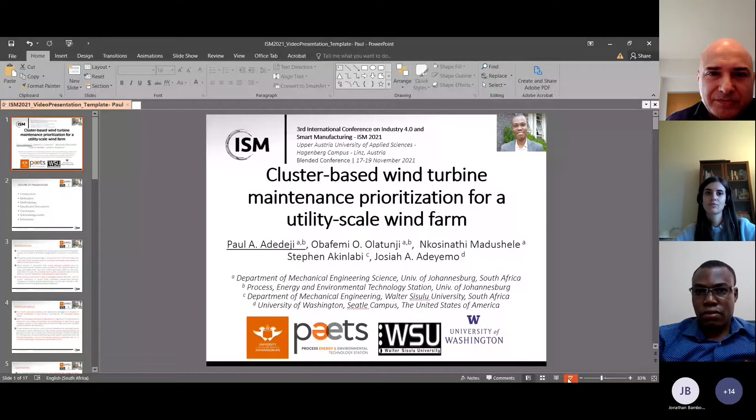Okay. Can you all see me? Perfect. Yeah, perfect. You can start. Visible. Okay, thank you so much.

Good day, everyone. My name is Dr. Paul Adedeji from the University of Johannesburg, and I will be presenting the article titled Cluster-Based Wind Turbine Maintenance Prioritization for a Utility Scale Wind Farm. And that is a list of the co-authors with which we worked together on this project, and their affiliations as well as their university logos. Yeah, this is the outline of my presentation.

Introduction. It is anticipated that renewables will occupy 2/3 of the global energy mix by 2050 if the renewable energy uptake increases by 1.2% annually. And that is what we have observed over the years, that renewable energy is fast taking up the stage in the global energy mix. And we could see the advent of more wind farms being added to the global energy mix.

And we've also observed that in ancient times, we just had one wind turbine, two wind turbines, but now we have large scale wind farms, and we have quite a lot of wind turbines on the farm. And this is not bound to reduce at any moment, but increase at a very high rate. For example, we could see the wind farms in Kenya, which is one of the largest in Africa, if not the largest. We could see those in South Africa. We have a lot here in South Africa, and this space is fast increasing.

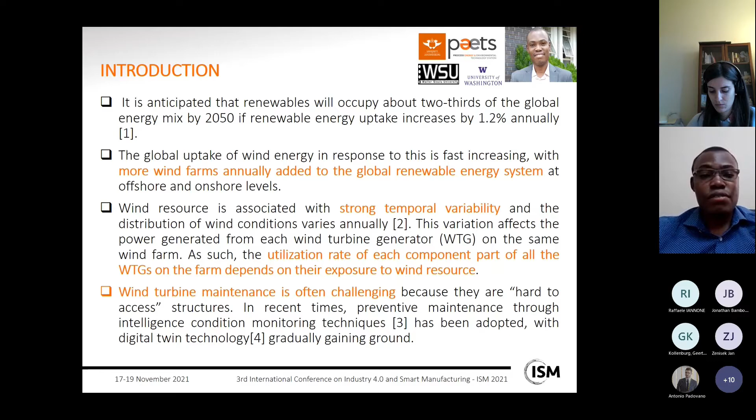So wind turbine maintenance has often been challenging because wind turbines are hard to access structures. We have some wind turbines that are 100 meters from the ground level. There are some that are situated at 80 meters. So many new wind turbines now have cranes that wind turbine operators or maintenance personnel could use to get to the nacelle. And this is very much challenging. Hence, intelligent condition monitoring techniques have been resorted to in recent years.

And the fourth industrial revolution, which has significantly leveraged the prowess of artificial intelligence in many sectors, is fast increasing. And of course, the renewable energy sector is not left behind. In fact, the increased digitization of renewable energy resources has improved the maintenance and operation procedures and schedules of wind farms through the use of intelligent models which leverage the data collected from supervisory control and data acquisition systems, that's the SCADA, of modern wind farms.

And cluster analysis is one of the useful tools that could be deployed on wind farms for maintenance activities. And that is the crux of this presentation or this research. Cluster analysis uses attributes of objects that are close to one another to cluster them together such that each cluster has similar or nearly similar attributes, with differences between the attributes of components of the same cluster not significantly different.

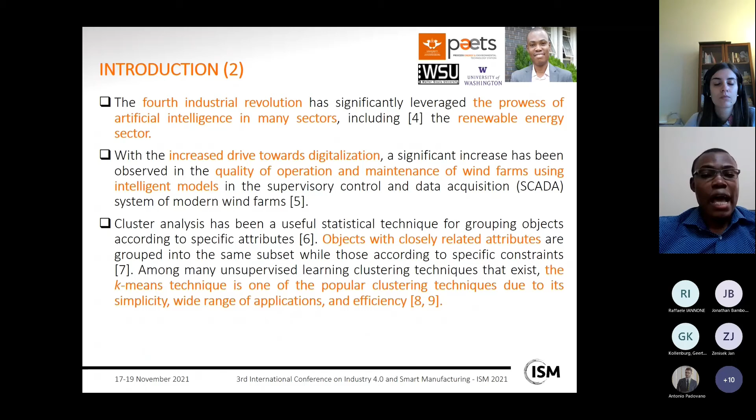And among these clustering techniques is K-means clustering. This is an unsupervised learning clustering technique which has been used in wide applications due to its efficiency and effectiveness. What is the motivation for this research?

We discovered that the growing demand for electricity in Africa, or let me say globally, has been on the increase, and wind farms are prolifically increasing. Hence, there is need for more strategic planning. And just as I earlier said, on the same wind farm, each wind turbine receives wind energy at different proportions due to the spatio-temporal variability of wind resource.

However, if these wind turbines receive wind energy at different proportions, imagine if we now have a very large wind farm with quite a lot of wind turbines, of which each of these wind turbines crave for maintenance, or maintenance activities are to be performed on each of these wind turbines. Yes, we have quite a lot of things that are to be considered.

For example, if we have 10 wind turbines that need the same maintenance or nearly the same maintenance all at once, how do we now prioritize? Which one should we go for first? Which one should we go for second? That is actually the motivation for this research, through the use of clustering techniques.

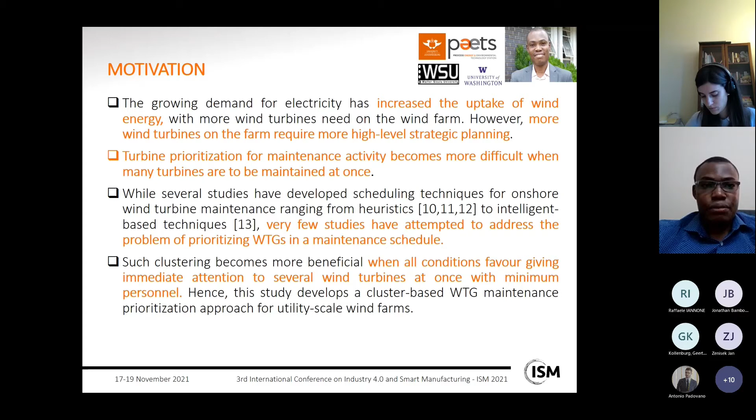So this study aimed at clustering all the turbines in the case study wind farm into different clusters based on the wind resource they received, and hence prioritize maintenance activities according to this. Of course, there are quite a lot of factors that should also be considered before embarking on such wind turbine maintenance activity. And that is the motivation for this research.

So for the methodology, we used Nojoli Wind Farm. Nojoli Wind Farm is one of the wind farms owned by Enel Green Power, an Italian independent power producer in South Africa. The wind farm is located at the Eastern Power Corridor of the Renewable Energy Development Zones in South Africa. It comprises 44 wind turbine generators, each of which has 2 megawatt installed capacity, which gives the wind farm an aggregate of 88 megawatts installed capacity.

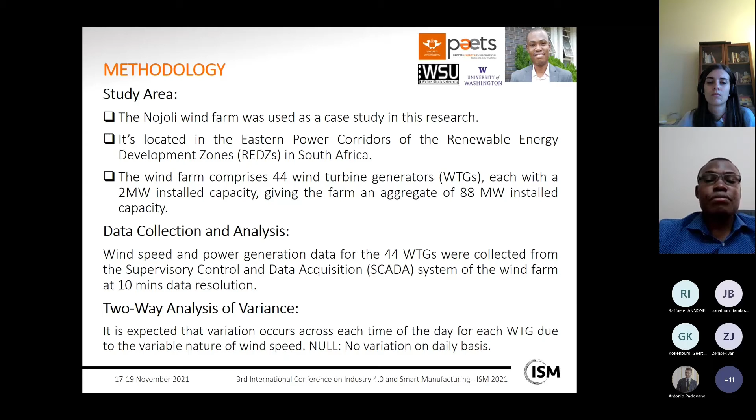For this study, the wind speed of all the wind turbine generators were collected at 10-minute data resolution. The null hypothesis we set is that there is no variation in the wind speed received by each of the wind turbines on the wind farm. That is, every wind turbine receives the same wind resource, wind speed, which we tested using the two-way ANOVA.

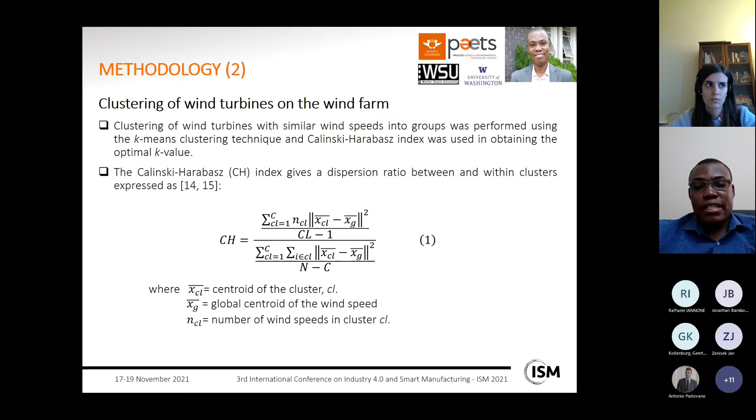We used the K-means clustering technique, and K-means is a parametric method which requires the user to spell out the number of clusters to be expected in the data set. And this is actually one of the challenges of K-means clustering. So we used the Calinski-Harabasz index to obtain the K value for the K-means clustering technique, as stated in equation 1 projected on the slide above.

We used the Euclidean distance metric for obtaining the centroid of the mean wind speed for clustering, as stated in equation 2, and the new centroid is calculated using the J function in equation 3.

The wind turbine generators that receive high wind speed are expected to be more productive, and most certainly they are susceptible to early maintenance due to continuous movement of the rotor. They produce more energy, they are economically viable. However, the consequence is the maintenance activity on such wind turbines.

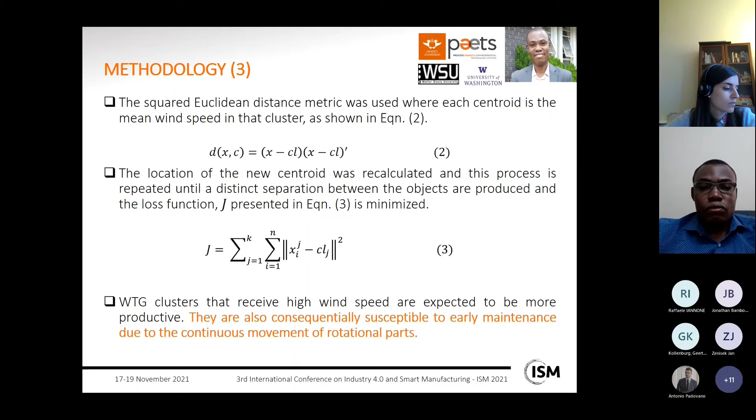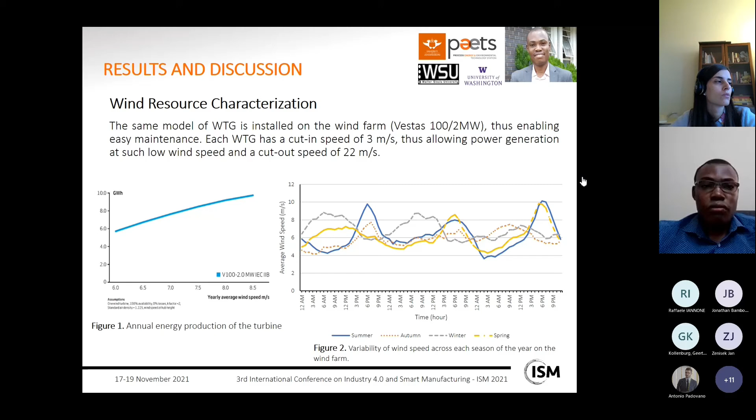And also we looked at the availability of the wind. Of course, the availability of the wind resource significantly varies from daytime to nighttime, and that is what we could see in figure 2. The summer period is associated with increased wind speed, and we actually did a form of ground verification of this in our site visit to the wind farm during the summer period to verify the result of this variation.

Table 1 gives the analysis of variance plot, and we could discover that the null hypothesis says there is no variation between the wind speed obtained at each of the seasons, at each hour, and for each of the wind turbines. However, we discovered that the null hypothesis is rejected. Hence, there's a variation between wind speed received from each wind turbine and each of the hours.

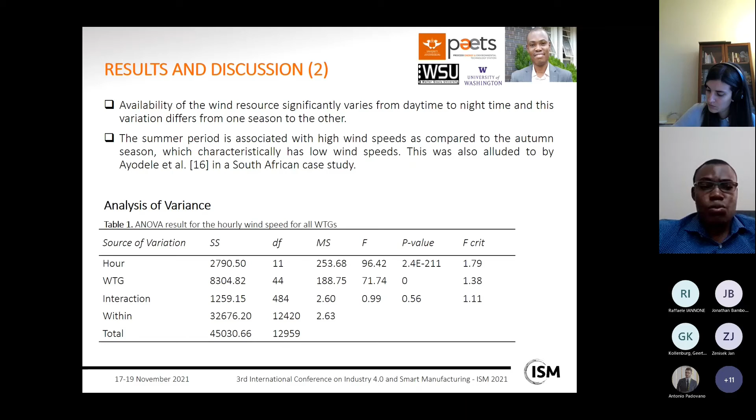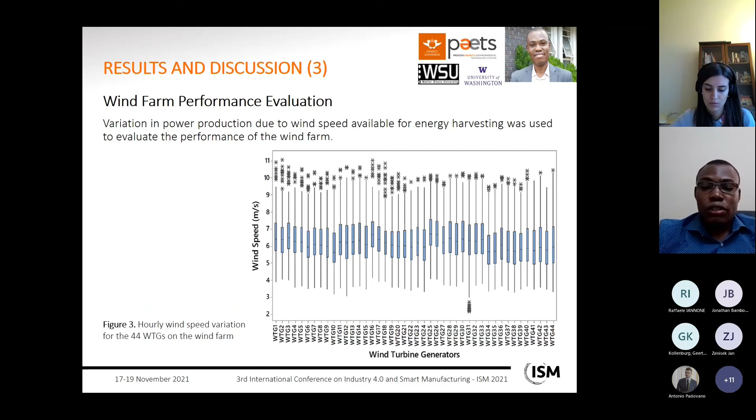So we looked at the wind farm performance evaluation also, presented in figure 3, and we discovered that wind turbine generator 31 receives low wind speed. Of course, that incurs more cost on reactive power to power the control systems on the wind turbine.

And the wind clustering result is presented in figure 4, and we could see that the optimal cluster we obtained was cluster 7. So we embarked on clustering all the wind turbine generators into 7 clusters, and we discovered that cluster 7 receives low wind speeds. Hence, those wind turbines in cluster 7 are not as productive as those in cluster 6.

Definitely, for any wind farm maintenance, if choices are to be made between the wind turbine generators in cluster 7 and cluster 6, it is wise, based on these clustering techniques that we applied, to first maintain wind turbines that fall into cluster 6 due to their productivity.

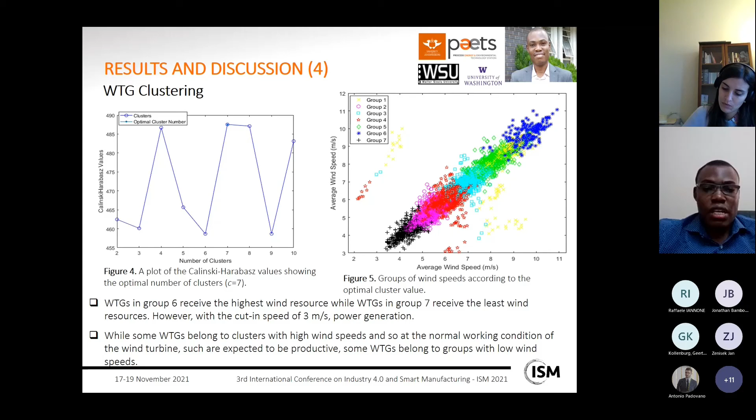Of course, there are quite a lot of other factors that should be considered because this is just part of an ongoing research. So we did not consider the financial impact and all that. That is in the subsequent research that we are presently considering.

Let's look at the cluster implications. Wind turbines that belong to cluster 2, 4, and 7 tend to receive low wind speeds and, of course, reactive power, just as I explained. If many wind turbines belong to this group, most certainly the power purchase agreement will be affected, because in South Africa every wind farm owner has a power purchase agreement if they are going to be feeding into the grid. So they have a clear-cut power generation that should be fed into the grid, and of course maintenance activities are also running in parallel.

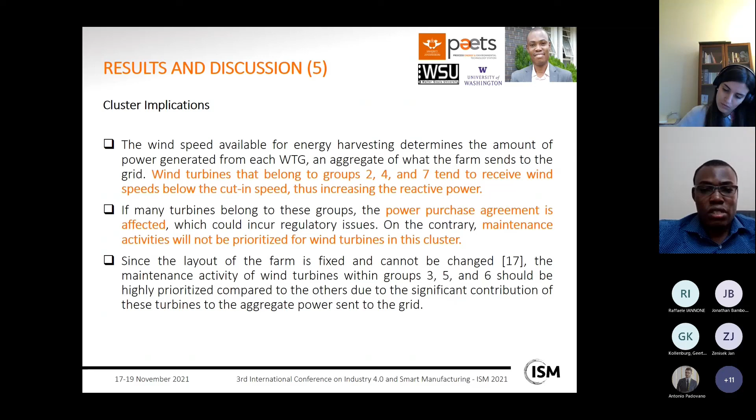Wind turbine generators that fall into cluster 3, cluster 5, and cluster 6 should be highly prioritized because of their high investment yield, because they receive more wind speeds. Of course, there are other factors in terms of financial factors, availability of maintenance personnel, and all that should also be considered.

But based on the cluster analysis technique, we discovered that cluster 3, cluster 5, and cluster 6 should get high priority. And in conclusion, there is presence of spatio-temporal variability on the wind farm, as we earlier spelled out and observed, and wind turbine generators that have wind speeds below 3 meters per second.

Of course, there are cut-in speed and cut-out speed for wind turbines. However, there are some wind turbine generators in a cluster that are not as viable as the rest. So, in conclusion, cost implication for each wind turbine will be considered in future, and that's one of our upcoming research activities. Maximization of profit and cost minimization will also be considered as a form of multi-objective optimization problem.